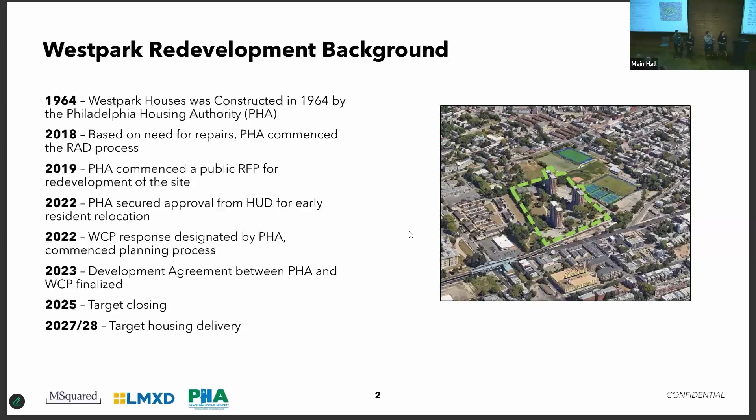So just really quickly, like she mentioned, target closing is this year. We're really pushing for a Q3 closing to start construction and start delivering housing for residents in 2027 or early 2028.

So to step back a little bit about Westpark Community Partners, as a team we bring really 40 years of experience structuring complex public-private partnerships that work with public entities to structure and manage financial investments that we think are pushing for the best spirit of those public policies and public design.

So my firm, specifically M Squared, was founded by a woman, Alicia Glen, who was the head of Goldman's Urban Investment Group, managing community lending, and then the deputy mayor of New York City for 5 years, managing housing and economic development initiatives in New York. Her thesis in starting M Squared was, how do you create a development company and a real estate fund that's focused on a new kind of real estate, specifically a mixed income approach to housing.

So everything that M Squared does is mixed income, mixed use, and sustainable development. We do this across the country. Three specific examples in Upper Manhattan: this is our Inwood site, a partnership in Lynnwood with the city of Lynnwood just north of Seattle, and a project in Dallas, Texas, where we're utilizing a Public Facilities Corporation to do a public-private partnership with that housing authority. Each one of these projects is at least 50% affordable to households earning 80% of AMI, and is also utilizing public and private resources to structure the investment.

So I just wanted to focus on that piece really quickly, because a really important part—we're going to talk about the design today from a physical perspective, but making Westpark a success is also really contingent on the financial design as well, and how we can work with a lot of different partners to structure the right kind of investment. I'll hand it to Kim.

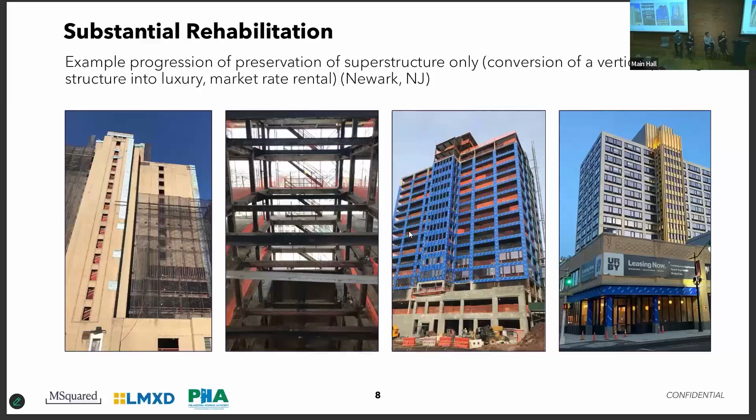This is another one in downtown Newark. It was actually originally built as a parking garage in 1920, which we did a gut renovation of, and it's now 200 units of mixed income housing in downtown Newark. It's not a public-private partnership, but a successful, really complicated financing structure in terms of how to bring public and private investment together to create something new, which is now a really successful community.

One other example that's really relevant here is our Banner Lane project. It's in Washington, D.C., a partnership with public agencies there, and it's similar to Westpark. It involves a return home aspect - formerly public housing and still public housing around the new buildings, but was redone to be denser, to allow more people to live there, a mixed income community where the original residents can return. That's another thing we've brought to Westpark, and we think will be really successful here as it was in DC.

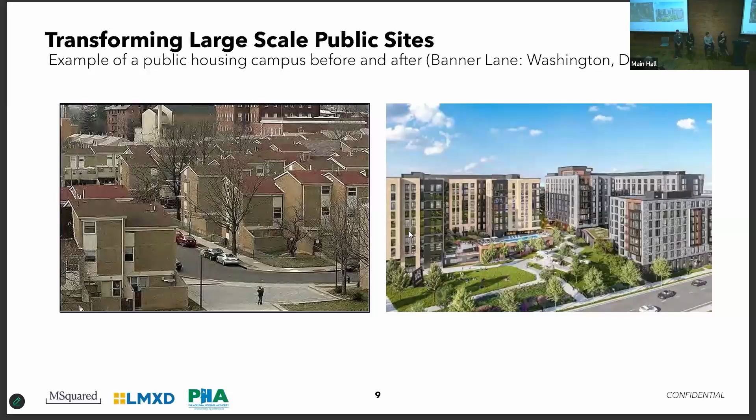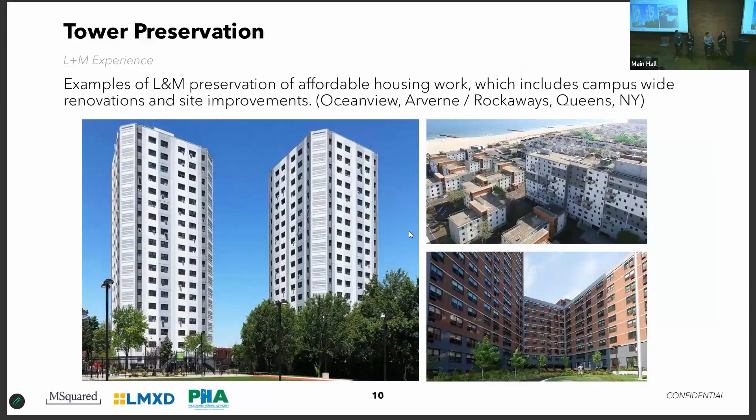Lastly, this is another great example of renovating an existing tower. This was a Mitchell-Lama Tower in New York City, now 1,000 units of housing. This one is fully affordable, not mixed income, but a good example of how we like to try to be really creative with reusing these existing towers to try to save money and help us create affordable housing with less subsidy. So hopefully that gives you a sense of LMXD and sets the tone for how our partnership has worked here, and in Philadelphia. We wanted to focus on those projects because each of them, I think, are precedents that our firm has brought, and those same principles have to a great extent reached their full vision in the design for Westpark.

So the future as envisioned for Westpark starts with the community it's in. What is the neighborhood context? What are the constraints? Westpark is so interesting to us because not only is it a super block, but it's a super block that almost has walled off these amazing resources around it. A long-standing practice of M Squared is to really try to bring economic integration and mixed income housing to high opportunity areas. And it doesn't get more high opportunity than the Westpark site.

I'll start in the Southwest with the SEPTA station. The L stop is a critical anchor for transit-oriented housing. You then have directly next to that an Aldi, a grocery store, so you have affordable nutrition right there on the site. You have the Enterprise Center, who runs some fantastic workforce and economic development programs throughout this community. To the north, you have Lee Cultural Center.

So we are actually building housing next to a park. There's an amazing question of how do you approach public space on the Westpark site, and how do you connect to and make sure we tie into this amazing public resource, both the park as well as the Lee Cultural Center itself. You then have, and I think this is particularly fascinating from an opportunity perspective, the Locke School with K through 8, a middle school, a high school, and a community college, all a couple blocks from University City.

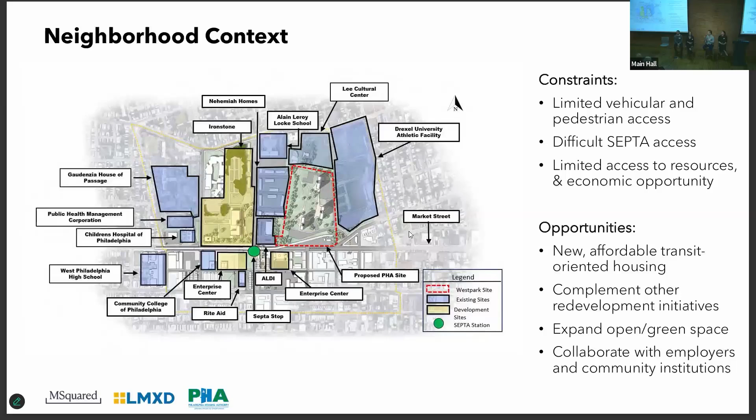And then the SEPTA is both an opportunity, but also something that cuts off the campus directly as SEPTA comes by the southern border. So how do you think about integrating the site with that in mind?

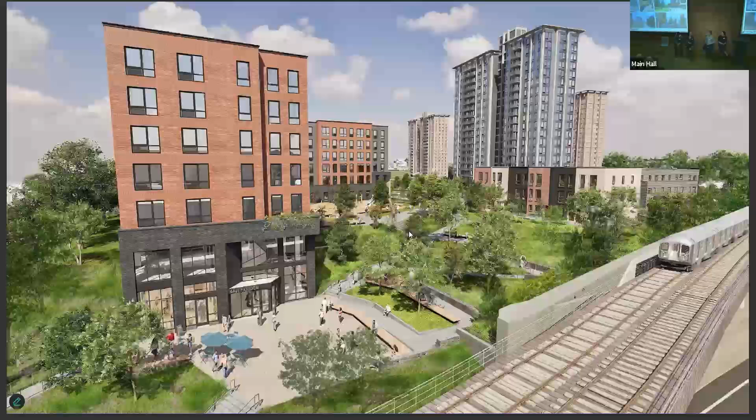And this is our... you're the first people to see this. So very, very excited. We just updated this rendering.

So this is really our new vision for a mixed income connected community at Westpark. It's a mix of typologies, bringing townhomes, which in our resident engagement was something we heard really, really loudly. Residents wanted to come back to townhomes. They wanted the optionality to either be in the renovated towers or the townhomes.

We have a new mid-rise here, which I'll show from another perspective in just a second, but it's an important way for us to add density close to the transit stop on the same plane without that grade change. And then, of course, the first of the 3 tower rehabilitations, and all connecting to SEPTA.

So to speak quickly about the actual program that we designed in partnership with the community and the Housing Authority, like I mentioned, the whole campus will have a mix of typologies between bringing townhomes to the site, adding mid-rises that can really help us deliver the density needed here, and then the rehabilitation of the high-rise towers, which help us, 1, from a density perspective, 2, from an embodied carbon perspective, and 3, just to create some pretty amazing views for the residents that will get to live there.

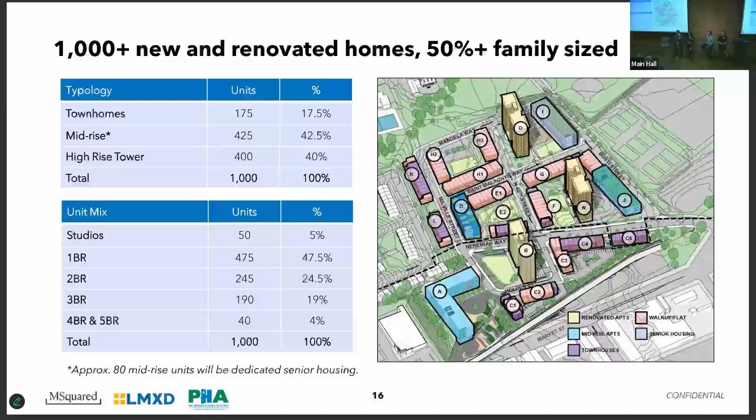One other point is that we have over 50% of this campus delivered as 2 bedrooms and larger. So a focus on housing that can accommodate families, moving away from a lot of the new development in this neighborhood that's focused on student housing. So that was a big priority of the housing authority and our design for the space.

And then as the council member shared, the first priority here is 1-for-1 replacement housing. So 327 housing units were here before, 327 units dedicated to returning residents will be here as part of the final program. We also wanted to extend that deeply affordable tranche.

So an additional 73 units, getting us to 40% of this campus, will be designated for individuals with incomes up to 50% of AMI who have and are recipients of vouchers through the Housing Authority. So they're not just the land partner, they're also a partner in maintaining the voucher housing that we have on the site.

We then have another tranche of moderately affordable housing. So these will be between 40 and 60. We might get up to 80 if we work out the income blending with the HFA. And that'll be an additional 20% of the campus, making for that 60% of the campus that is deed restricted affordable housing.

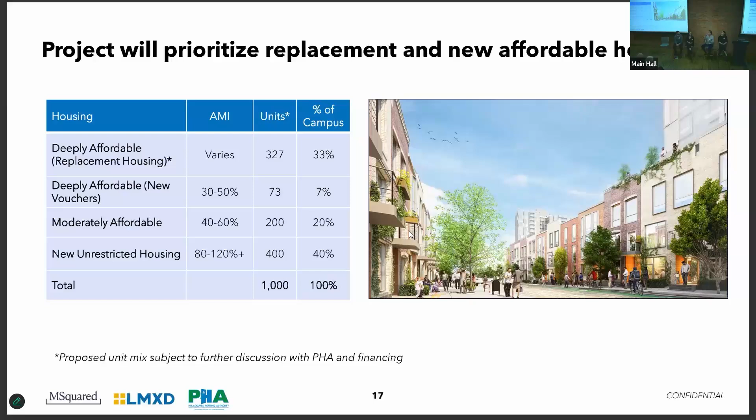And then new unrestricted housing. So a critical component of mixed income is having unrestricted workforce housing that is going to be at rents targeting levels between 80 and 120% of AMI. Those won't be restricted though, which helps us on the financing structure for the project.

Really quickly, this is the first phase. So this is what we've been working on and have been through the design process on, and we're looking to close on later this year. So these will be 3 independently financed transactions that are moving together.

There's a lot of complexity in how we structure that, but that's a different talk that we'll do, I'm sure, at some point.

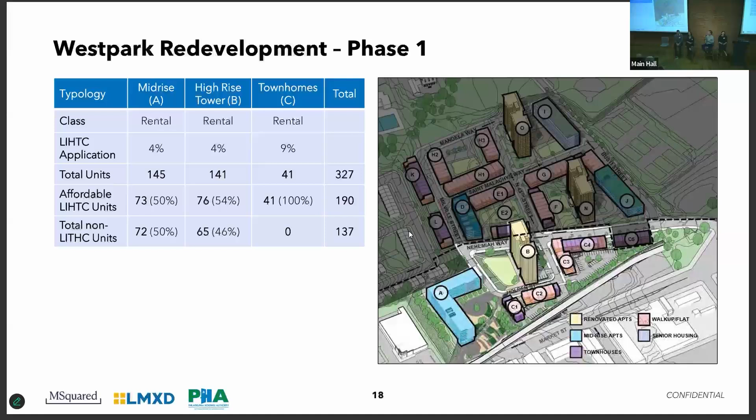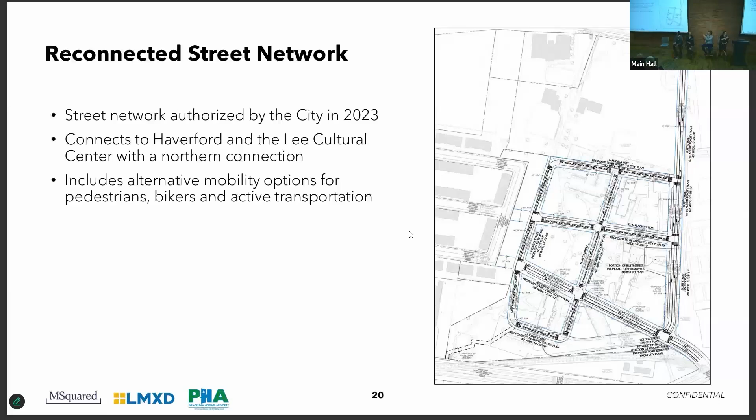So to focus on the design, these are just some quick slides about other principles that inform the development, interconnectivity, working with the council person on a new street network that has new ingress and egress points into the community.

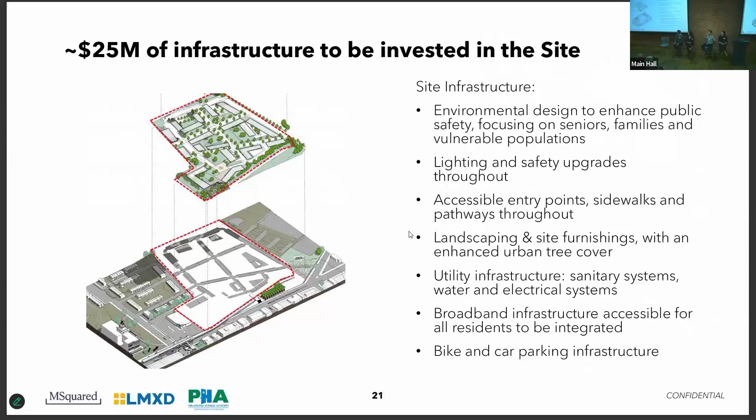Making sure that we're really investing 25 million of infrastructure throughout the site, which will undergird the additional housing, so not overburdening the existing housing that's in place.

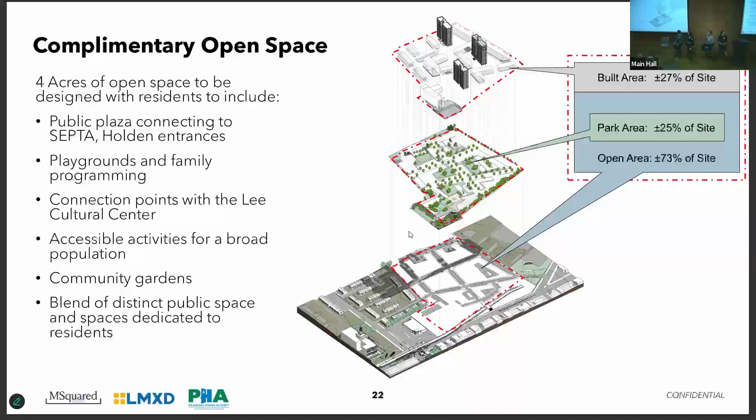Integrating open space, we'll have approximately 4 acres of open space that we're designing in as Olmsted connects up through the campus, and embracing principles of sustainable design.

So building off of our approach for rehabilitating the existing tower to reduce the embodied carbon, also integrating solar, the tree cover, and exploring geothermal for the later phases.

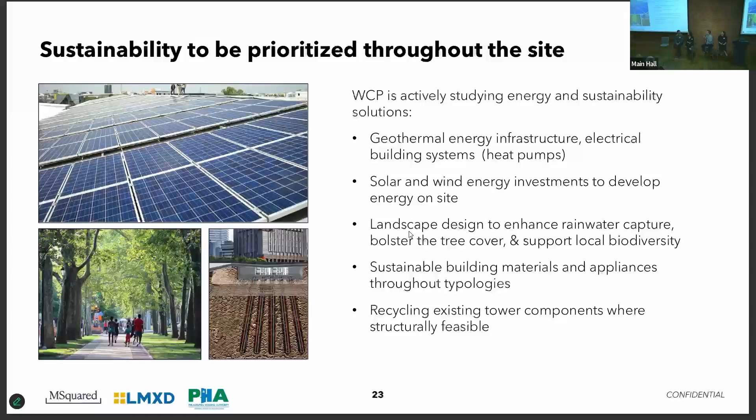Neat. Okay, I'm going to go up here. Yes, okay, this is working. Yes, okay, you need to see what I'm talking about.

Great, so just talking more about the site, I think I could talk about the site for hours. So I'm just going to try to talk about a few things here, but happy to chat after.

So a few of the things that Ian touched on, but I'll go through more, thinking about the connections. Really, it's all about the connections for this site. Some of the places that we're thinking about in the outdoor space, and then thinking about the environment, which you could also substitute that word for sustainability or climate resilience or any of those number of things that have to do with keeping us healthy and keeping our world healthy.

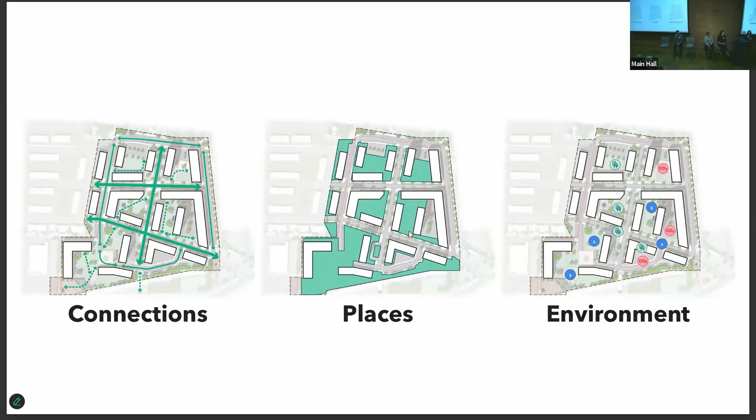There we go. So as I think you saw a little bit, there's sort of this bigger master plan, but then there's also phase 1, which is what we're hoping to build this year or start this year. So as I go through, I'm kind of going to flip between these two things because there's the principles that cover the full master plan, and then we're getting to kind of test them out and design them in phase 1.

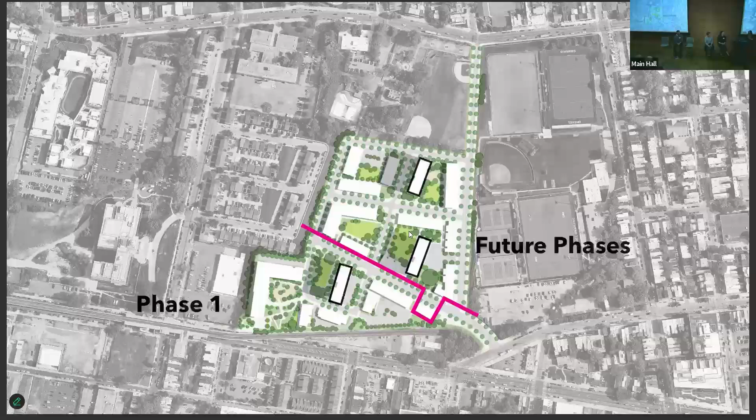And so connections, the site is really kind of an island. It's very fascinating to me as someone who really likes reading a site and learning about a history of a place. But if you just look at it, it's kind of has a lot of green space right now. It's very different from the rest of the city grid, different scale. And weirdly, it's like it's very high. It's about 10 to 20 feet above everything around it.

So very curious. And so if you look back, it was actually part of this Pennsylvania Hospital for the Insane. Really interesting history. It feels weird to say I'm inspired by a hospital for the insane for this site, but this was kind of groundbreaking at its time. This was one of the Kirkbride hospitals, and he really felt that the environment that people were in could actually help heal them. And so it wasn't to lock people up, it wasn't to shut them away, but really this was a healing place, and he really used the landscape itself as part of that healing activity.

So these are all, if you could read the words, it says the pleasure grounds of the Pennsylvania Hospital for the Insane. So a lot of space for people to get outside and be in nature and even work and garden outside. And I think a lot of these ideas are coming up again today.

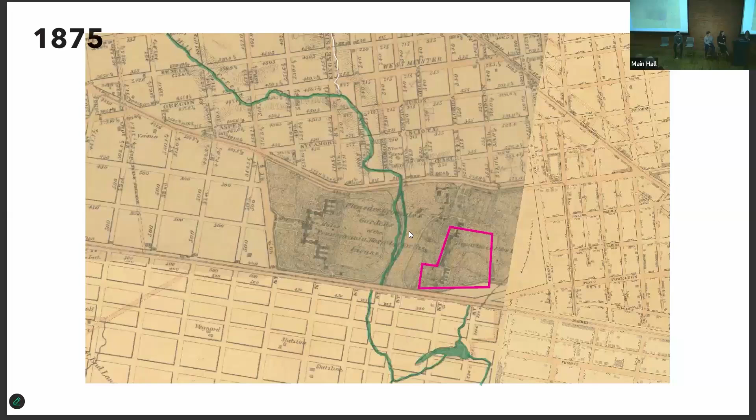But really the other thing that makes it an island are the edges. It has walls, it has berms, it has barriers, it has fences, it has buffers, and the only real place you can come in and out, does this work?

No, wrong thing. Red line. Sorry, oh, I went too far. Way too far, sorry.

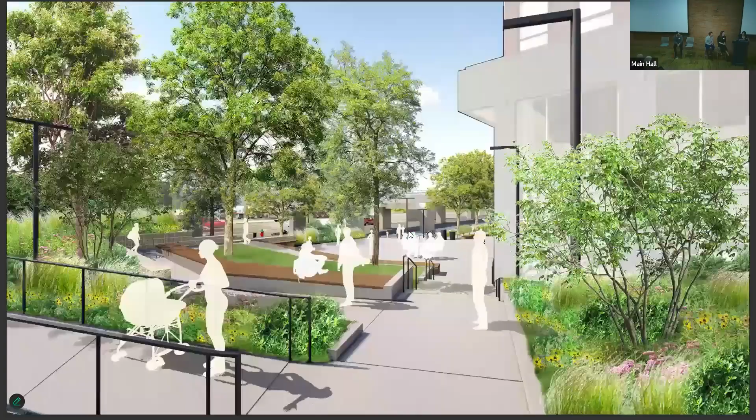Sorry for the preview. Everyone close your eyes. Yeah, okay.

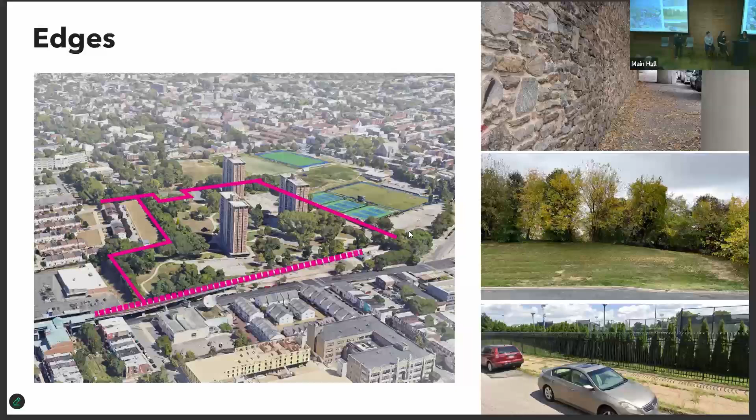That's really the only in and out right now. So part of the idea of connecting, and I want to say reconnecting, but it was never really connected. So we're connecting for the first time. Thinking about keeping that one entry right now, and then connecting up to Haverford, connecting to Lee Cultural Recreation Center, and really connecting to the SEPTA station and to Market Street itself.

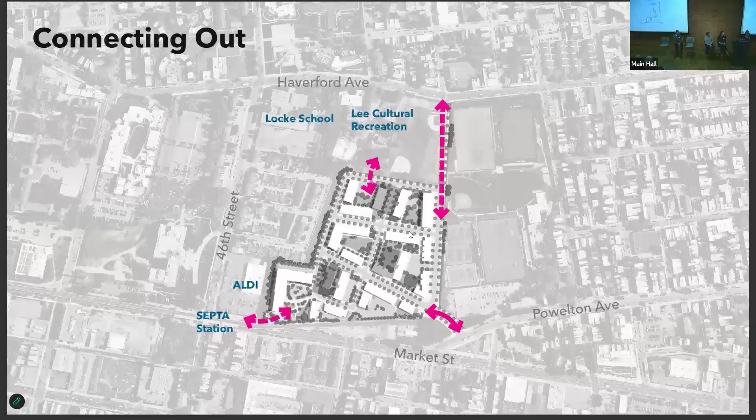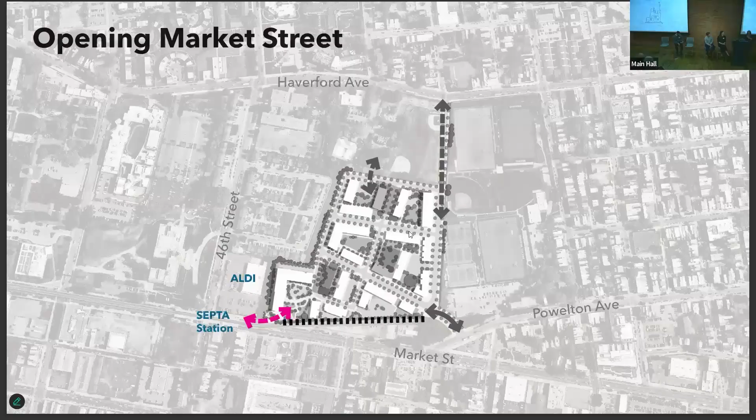In phase one, that's when this Market Street access will happen. Access to Powelton Avenue will happen in phase one too, but the others to the north will have to wait for the next phases. So this is what it looks like on Market Street right now.

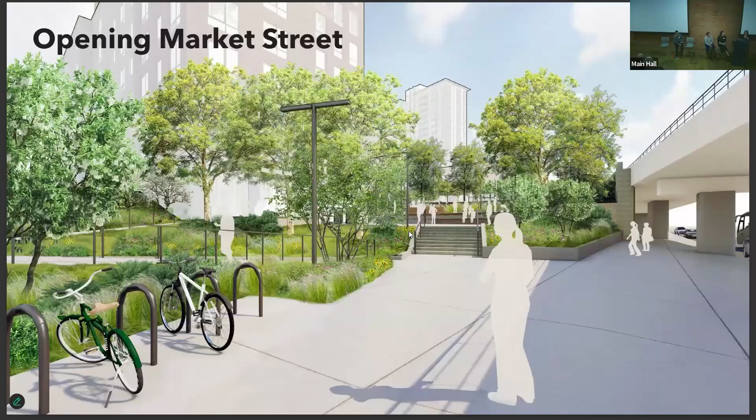This is our proposal, what we've been designing and what will be constructed, to really open up that space, take down those walls, and excavate a lot to bring down the life of the site down to Market Street level. That's basically more than a story of a building down to street level.

So you can see here, this is just a little overlay to show it's about a 20-foot grade change right at that corner with that mean little stair.

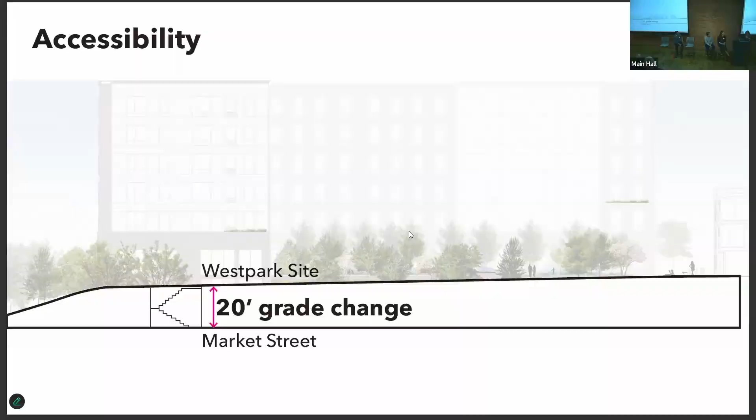The idea is to really open that up, bring a commercial or retail space down to Market Street. And then also think about how we can design a ramp as a place, so it doesn't feel like an onerous circulation way to get up to the site, but really is a place that can be activated, can feel easy to get through.

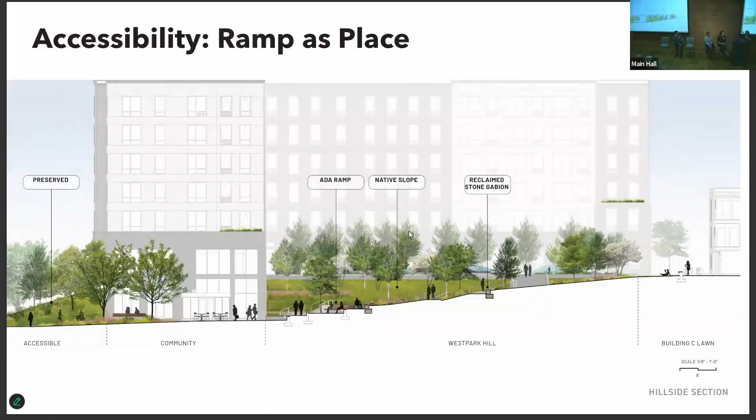We'll talk about this a little more later, but also the planting strategy is really to use lots of native plants, lots of plants that are tolerant of drought, don't need too much water, and use lawn, but kind of sparingly, because we know lawn is not great for the environment and for our climate.

So you'll see that. Okay, then connecting within. So really thinking about instating a street grid to break up the site, to create access to new buildings. But how do you get through the site as a pedestrian? Because as we know, the cars are really only coming from this way, but the pedestrian access wants to be this way, because that's where the SEPTA station is.

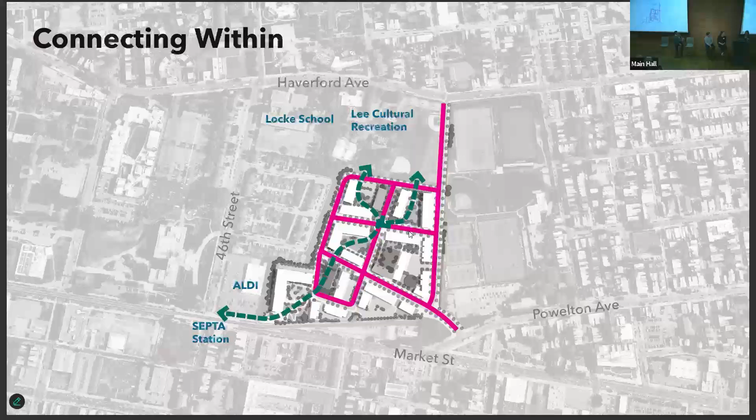This bigger site has always been a barrier for all these neighborhoods around here that might want to get to the SEPTA station. They can't really go through here, they have to go all the way around. So now we're thinking about how other neighbors can come through this site and use this place too, so it's not just for Westpark, but for the surrounding community.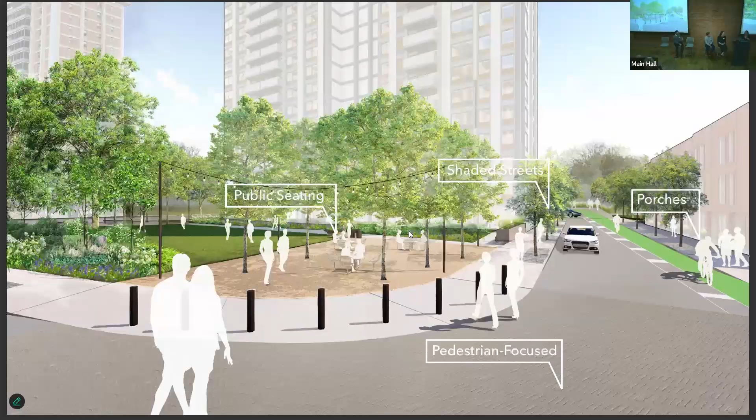Just a little bit about the streets, really activating the streets. We know streets are really important public spaces for Philadelphia, so thinking about how to use those things here. Also really prioritize pedestrians with street safety, like raised tables and things like that.

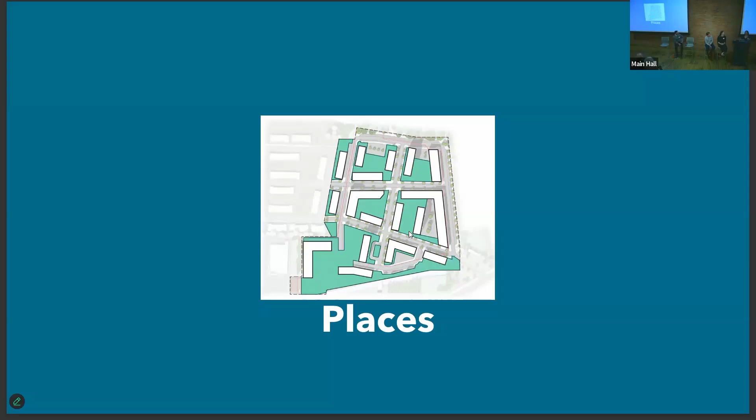I think I'm going long, so just a little bit about the places between all of these buildings and all this density—really creating lots of little public spaces, some small, some big, for the people that live here, but also for the community, and how those spaces actually form this chain up through the site and help reinforce that connectivity through the site.

Again, going to the site, it's very curious. It has these kind of remnants of this pastoral life that it used to have when it was the hospital site.

Again, looking back at these maps, there was a vegetable garden that was 3.5 acres. There was the gentleman's pleasure ground, there was the ladies' pleasure ground, there was a 10.5-foot high wall around the entire thing.

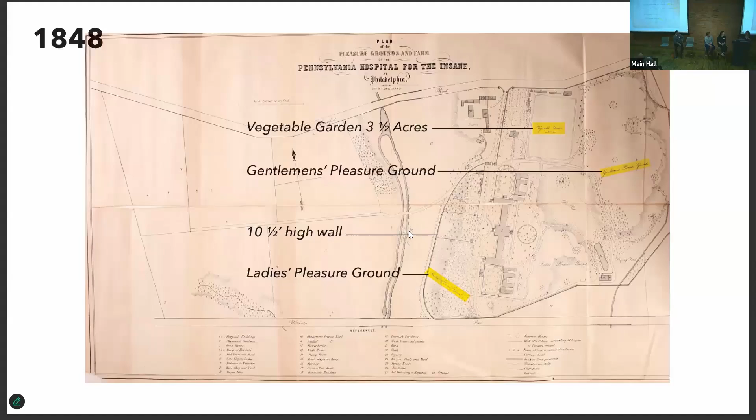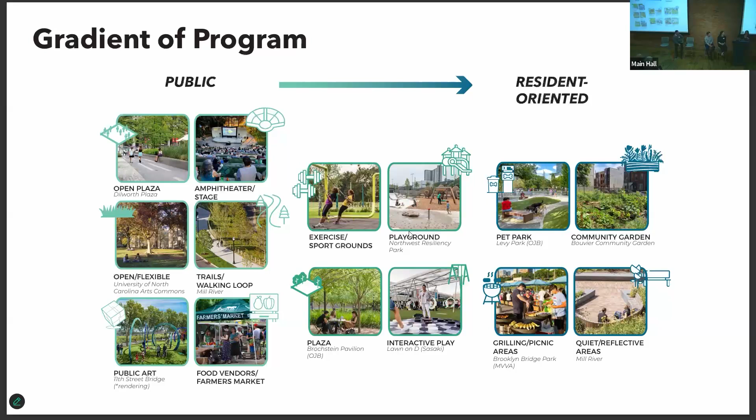When we're thinking about the open space, we didn't want to just do pastoral. That's not really what we do anymore, that's not how people live. So we started to think about needing this gradient of public space, but also private space, more resident oriented. How can people feel like this is also their home, not just this place for everybody else? So we thought about this gradient of uses and program.

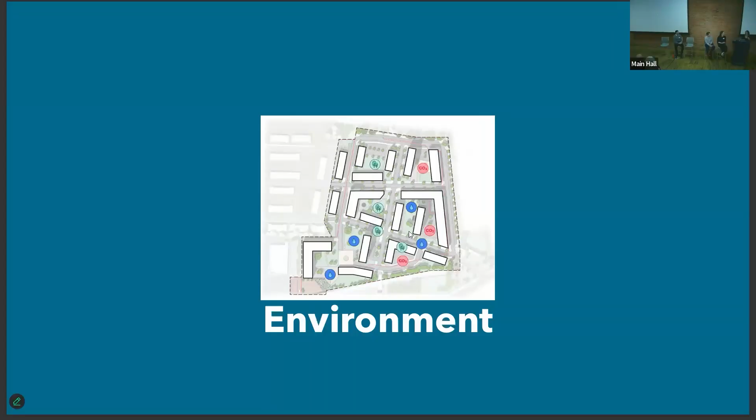Okay, last is the environment, which is lots of things. I think the one thing I wanted to touch on is that we know everything's getting hotter. Philly is getting hotter, and we definitely have urban heat island issues in Philadelphia. There's association with our tree plan and trying to combat some of this.

And I would say, from a landscape architect who cares a lot about biodiversity, building denser in the city helps save the habitats that are not currently developed elsewhere. So we need to be doing this, but we need to do it smart.

So we're trying to figure out how do we balance shade in the city, open space, stormwater management, and things that will make people's lives healthier and more resilient. So we have a robust planting strategy.

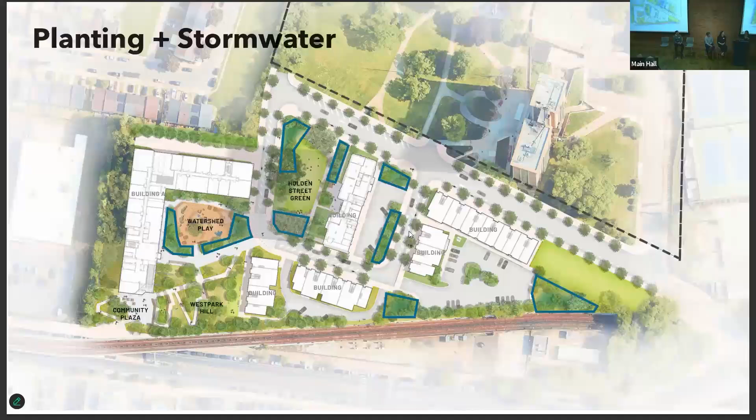We have stormwater gardens throughout the site, trying to treat a lot of that at the surface, but also make it an amenity. One thing that is exciting to me is thinking about material reuse, to minimize the carbon footprint.

There's this really cool wall that is under the SEPTA tracks. Right now it's blocking things off and you don't really see it, but we're thinking of dismantling that and reusing it in gabions to retain everything around the ramps. So I'm very excited about this.

There was concern that we'd have to break all the mortar off of the stones, but mostly they don't have any mortar left. So I think we're okay.

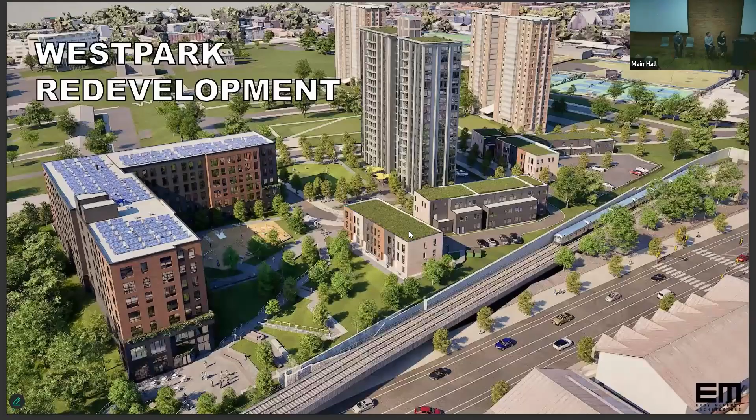All the mics. He's gonna try and use the stationary one. This one's on? Okay.

Good evening, everyone. It's so nice to be here with you. Once again, my name is Drew Kometz, and I'm with Erdy McHenry Architecture.

Our firm has been working with both Westpark Community Partners and some other organizations in West Philadelphia for about 5 years, rethinking parts of West Philadelphia, including the Westpark site itself. I won't be able to take you through that entire history in the time I have available. Working with Westpark Community Partners, we got up to scheme 14D or so of different master plans, which was a lot of fun to go through.

But as you can imagine, there were a lot of considerations, as you've already heard from the rest of the team, that we took into putting the project together. So I'm going to highlight a little bit more of the history that I don't think Marnie necessarily touched on, and then go through some other considerations about putting the master plan together.

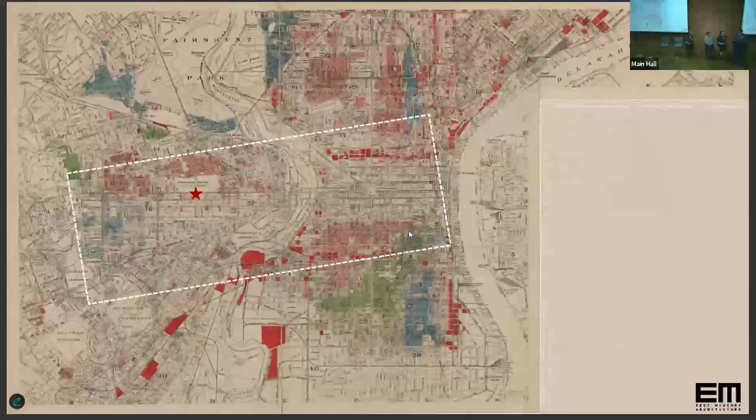Philadelphia has a long history of developments. Marnie talked about the time of this site's history as the Kirkbride Center. You can see now how it's being influenced by the spread of the University City complex, which is maybe not the most affluent neighborhood of Philadelphia, but it's very rich and developing, and makes the site subject to gentrification. So that was definitely a concern for the design team, to come up with reasonable mitigation and balancing of those natural desires to redevelop the site, but to keep it true to its history and to equity in the community.

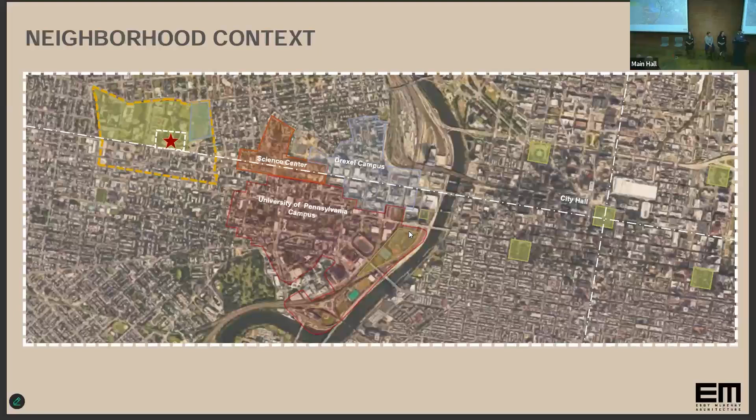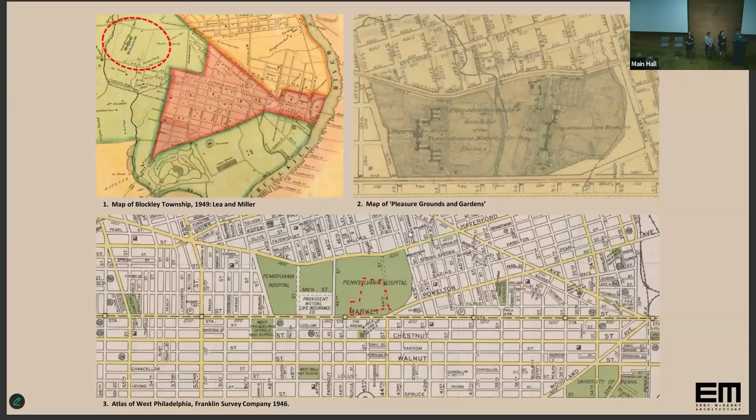Even going back farther, there's remnants before the development of the Kirkbride Center and Native Americans who inhabited the site. I think Marnie touched on a lot of this. So this is that time as the Kirkbride Center.

Maybe one thing we didn't talk about too much is the SEPTA line. Originally it was a trolley line running down Market Street, and then it got constructed as an overhead line, which you can see now existing west of the site. In the 1950s is when the impetus to take it underground came, and maybe unfortunately for us, our site was chosen as a place for that transition to happen. So that's where we have the big sweep coming in, and the rest of the line eastbound continues underground to Center City, and the original above ground structure remains westbound.

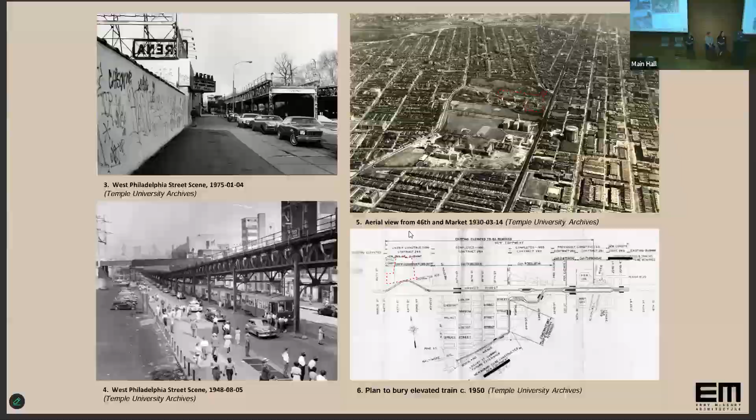This site was built in the 1960s, about '62, inhabited around '64, '65. It's a quintessential towers-in-the-park plan, which by the 1960s was starting to fall out of favor. It was really a product of the New Deal in the '50s. I think people were already starting to recognize some of the problems with it, but there were definitely a lot of forces pushing towards it: the efficiency of building one more story on a building is a lot less than building a new structure, the efficiency of land use, the cost per unit. I've even seen it read that maybe the hubris of the architect could have had something to do with it. These are Harbeson buildings.

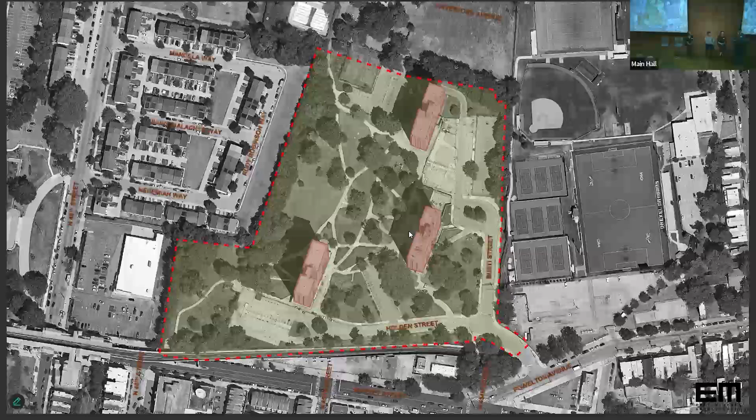But the last, not doing math, sixty-some-odd years probably haven't been super friendly to the building. Graffiti has taken over, the buildings are now completely unoccupied. The balconies were maybe a little ambitious and had been covered over to deal with some tenant issues.

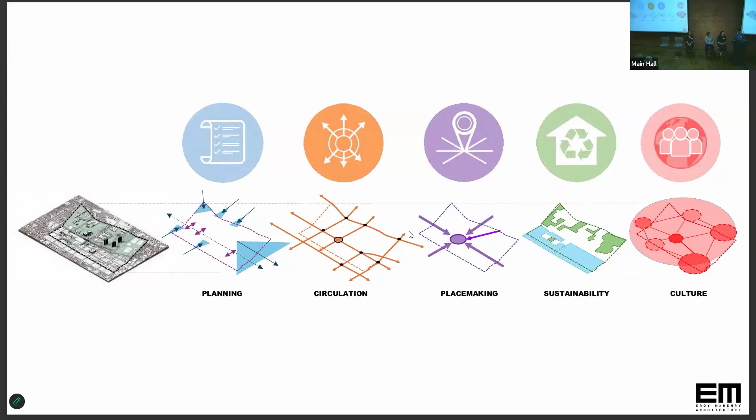So some of the things about analyzing the site that I don't think the rest of the team touched on yet tonight: we looked at planning, circulation, placemaking, sustainability, culture. This is a real transit-oriented development site. There's a lot of actual stops on the L line, and there's a lot of other mass transit lines that run through here.

We looked at reconnecting the grid. I think Marnie talked about this a little bit. This was kind of originally a single bucolic site, and we're trying to introduce parts of the street grid that make sense to reintroduce it and make it more connected without totally chopping it up.

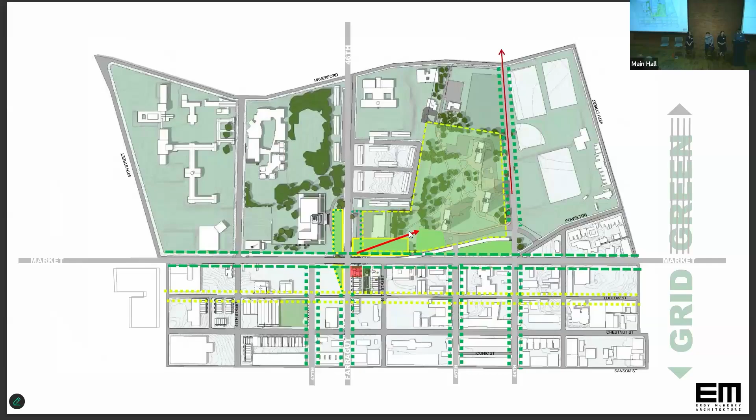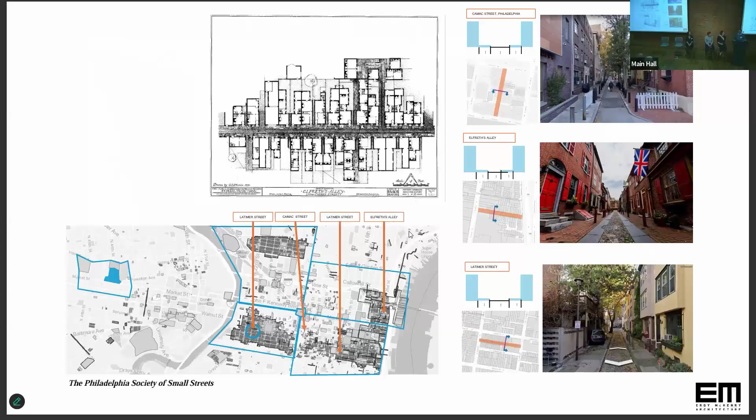And in part of doing that, we looked at some other street examples. We were really drawn to some of the smaller streets in Philadelphia: Elfreth's Alley, Latimer Street, Camac. We took that inspiration because we had to lay out a new street grid that could service the buildings. We had some excellent partners at Langan who eventually informed us that fire trucks need to get down streets, so we weren't able to make quite the degree of quaint streets we might have been looking for, but I think we came up with a nice solution. Those streets are multimodal, they have green infrastructure in them, and they do let fire trucks protect our buildings when needed.

One of the other things that our team latched onto was West Philly Porch Fest, which we tried to reinterpret in one of the building types, the townhouse types. I think it also just talked to how the community can define itself. I was reminded recently that sometimes community can actually be a term that's exclusive, like people can make communities that are small and insular and not dynamic and diverse.

We thought the West Philly Porch Fest is a good example of how community is really about meeting other people where they are.

As I said, laying out the infrastructure and geometry of the site, we really tried to maximize park and open area and minimize the built area. We had pretty strict unit counts to meet with the Westpark team, which Ian presented earlier. To get 1,000 units, we balanced putting those in the existing towers, some mid-rise structures maxing out the efficiency of that 5-over-2 podium construction, and the townhouse typology that a lot of the existing residents were really drawn to.

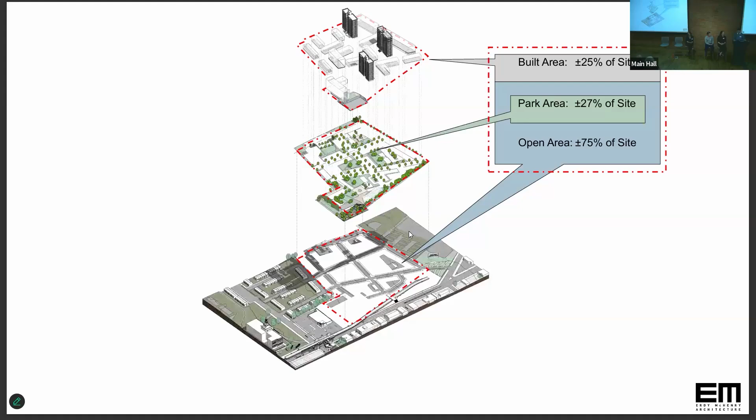The existing structures are big and there are a lot of them. As the council person mentioned, one of the original proposals was to demolish one or two of those and only leave one for senior housing. It's been quoted and misquoted in many ways, but the greenest building is the building you don't have to build. So when our team got involved, we strongly advocated for figuring out a way to keep the buildings with all that square footage available.

The 1960s construction and its austerity probably helped us a little bit. The ceiling heights aren't quite what we'd want, but there wasn't a whole lot of miscellaneous construction to get rid of. For fans of architecture, some of the original plans are amazing to look at, all hand drawn from Harbison's office.

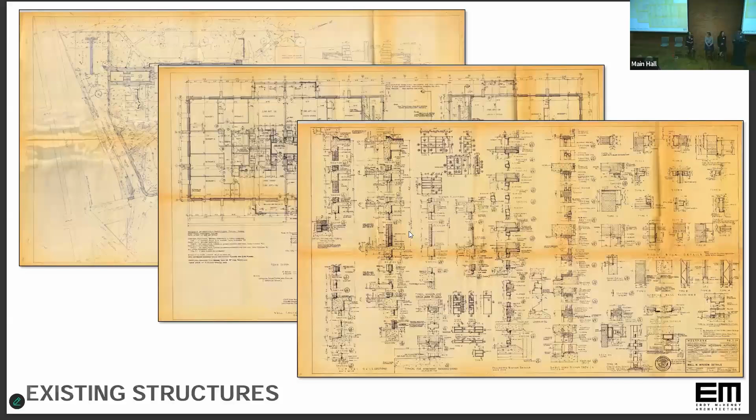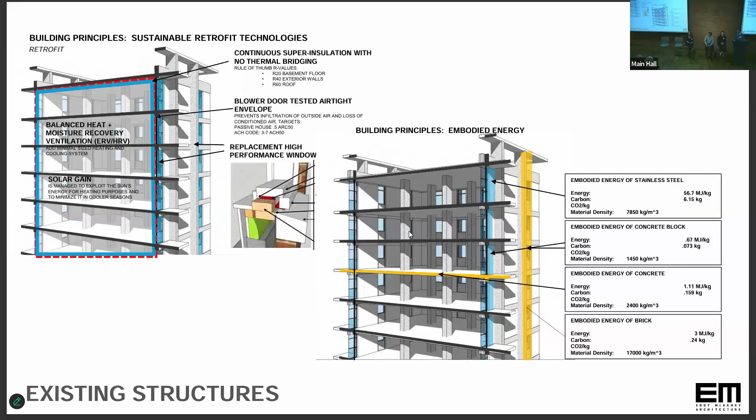This is a very short summary of a lot of analysis our team did, looking at all the embodied carbon in the existing brick, concrete, and steel, and how we could enhance the energy efficiency and thermal envelope of the building to approach what a modern building would be, without having to invest all that new carbon into it.

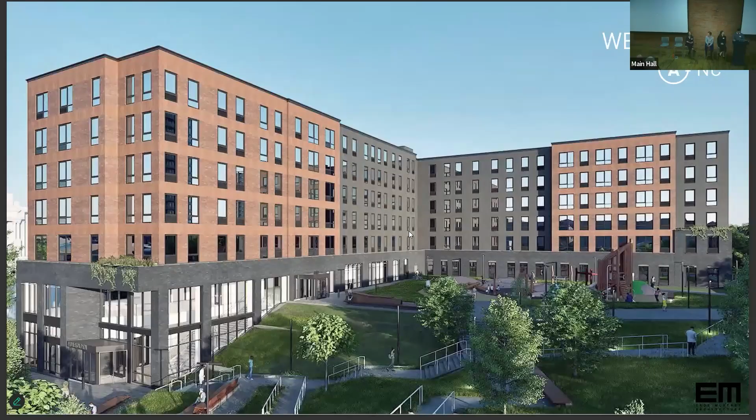Now we'll talk a little bit about the actual architecture of the buildings. We have building A, building B, and building C in phase 1 - very creative naming structure. We had a lot of things going on, so we kept the naming pretty simple. Building A is the first building in phase 1, a mid-rise construction.

It's podium construction, 5-over-2, wood over steel. We had some budgets placed on us, but I think we worked really hard with the ownership team and the rest of the consultant team to come up with a pretty interesting massing that has some variety to it, and also some intricate details. Here's an example where we're working with the same brick pattern but turning it around a bit. We've integrated the mechanical system into the overall window design, and we have some other materials. So we're trying to work within economies of scale but produce a pretty aesthetically pleasing result.

Marnie talked about it on the site. Building A is at the southwest corner of the project, where we're carving out that 20 feet to get down back to the Market Street elevation. So inside building A, we're also allowing that connection to happen. You can see outside the windows in this image the terracing of that grade outside. So we have a 2-story lobby in building A that's emulating that inside.

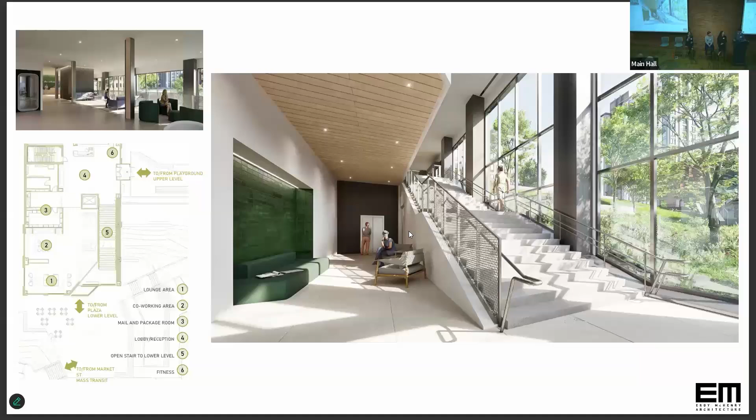Building B is the existing tower renovation - essentially an entire gut and reclad. So it's not clad over; we're actually taking the existing infill brick and window panels out. I have an image coming up that goes over that a little better. We'll actually be leaving the existing slab edge there and doing more of a curtain wall type installation past the slab edge, which optimizes the new thermal envelope of that building, getting a couple extra square feet while we're at it.

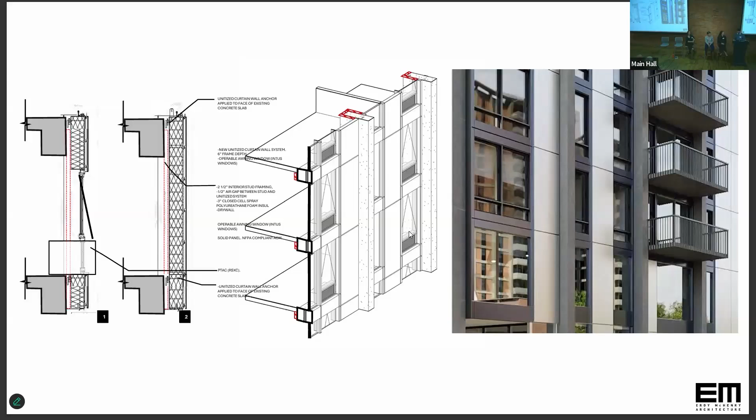And then the last building to talk about is building C - these are the townhouses. There are actually 4 different structures of them, either 2 stories or 3 stories.

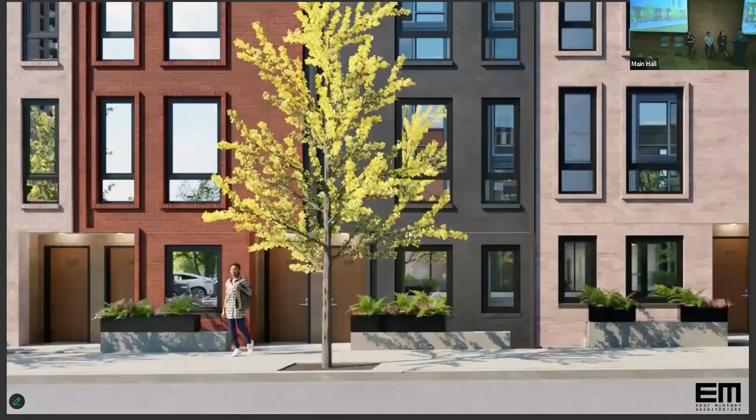Well, technically none of them are townhouses because it's a multifamily building, but some kind of have that design where you walk in and the first floor and second floor are yours. And then we've also had some that are flat on the first floor and just a walk-up as a separate unit on the second floor. So really offering a real variety even within this seemingly repetitive elevation.

And once again, we kind of worked with the palette to add some variety. There's recesses between the buildings. There's some framing and brick detailing around the windows to add some aesthetic interest. And I think maybe there's another image, but this is then our interpretation of that porch concept.

So there are these planted retaining walls at the property line, but then there's also a 3-foot kind of private sidewalk zone. So there's an approach to the building that's very public, then there's a semi-public, semi-private zone, and then there's the actual recessed entry, which would be private.

So we think we've done a... we started wanting stoops, and then we were quickly told those are not ADA, so they got flatter, and then the square footage requirements got smaller. But we worked hard to retain something in the vein of private, separated space.

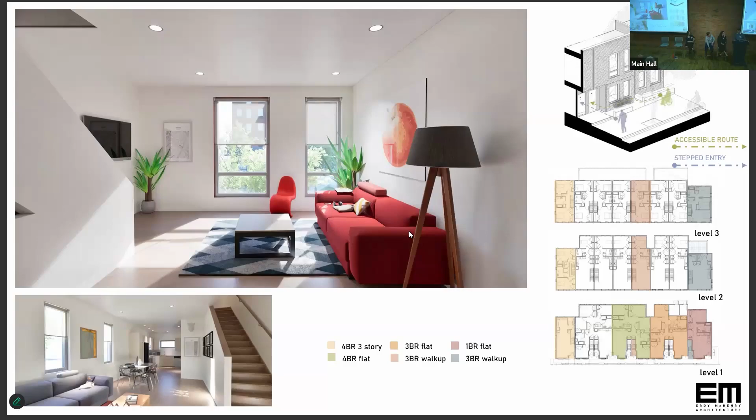And yeah, this is that diagram of how the units stack on top of each other. I think that's all I have.

I think we're going to do questions. And do you want me to put up a different slide? Yeah, can you put up the rendering in the middle?

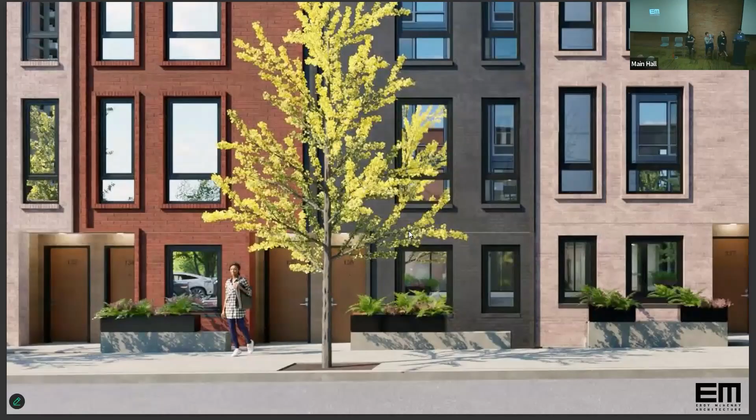And I think a couple notes on the design, just from our perspective, because we're at the Center for Architecture, that we thought were interesting. There's a couple challenges with what materiality do you want to focus on. How much do you want that materiality to be the same between the different elements and typologies of the campus? What can you pull and borrow from both the existing site, from the institution that was there before? And I think for us, the key piece there was brick.

But also, how do you build a new brick building on a public housing site that doesn't draw back to a generation of building these brick buildings that aren't thought of as safe? And so that's where we came with the architecture team to some of these distinctions, having a difference in color, materiality, step backs, trying to really work to have a human scale entryway that feels new, that feels open, that feels light, that integrates with the site, but also pulls from some of the more traditional brick and material that you have throughout the neighborhood.

For building B, the tower rehabilitation, this one's really tricky because we need to have this Dextall paneling that comes in and can be prefabricated and installed on site. And that doesn't look very good as brick. So I think that pulled us away from some of the more contextual, natural materials that you have in the neighborhood.

And so then the question was, okay, what do we like about the existing towers that we can bring to the fore? And I think for all of us, something that really stands out is the verticality of these towers is really unique and interesting. So how do we have a vertical design that really pulls the eye up, that's unique, that definitely juxtaposes with the other buildings on the site?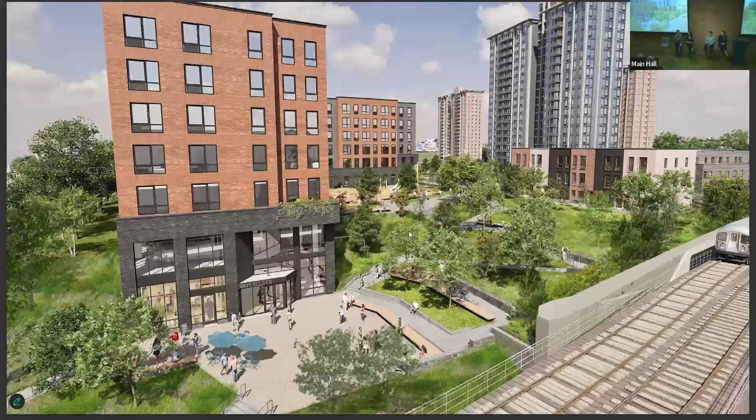The reality is that it's a city and the background noise is relatively loud to begin with, so it's not quite the same as a train going by in suburbia when it's in Philadelphia. So that will be addressed in our marketing materials.

Urban grit is. But I think there's a lot of planting, which wasn't necessarily analyzed, but does do a lot too. Well, yeah, I think so.

Planting's funny. Planting doesn't really help block sound very much, except perceptually, right? So if you don't really see it, you hear it less. So there's a lot of planting to try to help as a visual buffer, but I don't know how much it will help sound.

Hi, so I also have two questions. Very curious about the zoning process on this. Because of the density and working with the community, I wonder how you arrived at where you arrived. And I'm also very interested in the townhomes because those are historically kind of tough to develop too, so if you could talk more about the townhome portion. And I guess 2.5 questions: did ADUs, accessory dwelling units, come up at all?

Yeah. Oh. I'll start with the townhomes and I'll pass it to Drew to talk about our zoning process and how we thought about eligibility in the TOD and the MIN.

The townhomes start with, this was a real mandate of the Housing Authority based on feedback from the residents. A priority here is replacement housing and what kind of replacement housing is wanted. A lot of residents have seen some of the more successful Housing Authority redevelopments bring townhomes to those communities, and there's the perception of more private space.